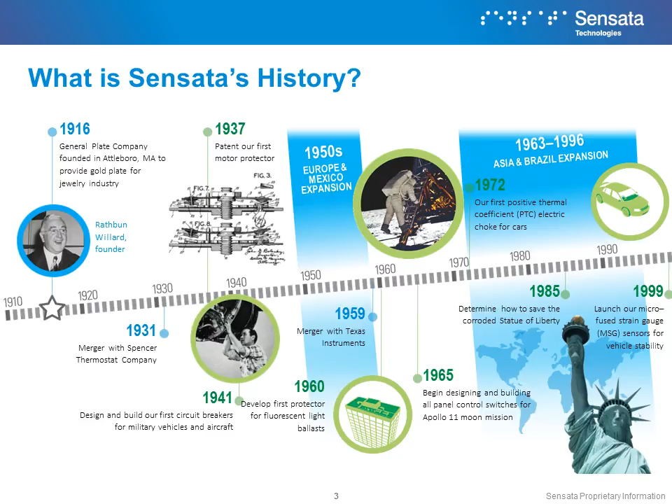Sensata started with the automotive pressure sensor 30, 40 years ago, and over time our product line was added with high temperature sensors, which we acquired through a company called Sensor-NITE in Europe. We acquired Honeywell's automotive on-board business, which offered Sensata magnetic speed and position sensor technologies.

Very near term, we acquired a company called Schrader, through which Sensata was able to acquire the product called TPMS, tire pressure monitoring system sensor technologies. The latest partnership that we have is with a company called Quanergy, which is a Silicon Valley-based company in the United States.

Based on the partnership, we are specialized in developing and commercializing solid-state LiDAR sensors, which will be used in autonomous drive.

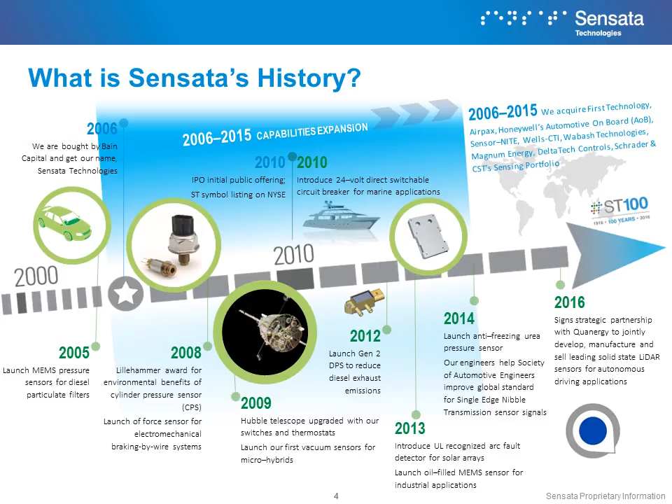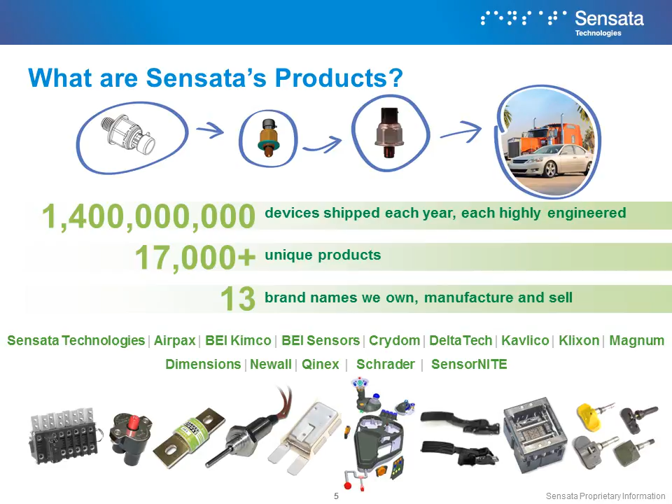Today, Sensata is shipping 1.4 billion devices, most of them highly engineered, to our customers worldwide. As many global companies do, Sensata has a global footprint in manufacturing and business, with many sales and engineering offices around the world, very close to our customers, where we can meet and respond to their needs and solve their problems. In Asia, we have footprints in China, Japan, Korea, Malaysia, and recently India.

We have an automotive headquarters office for India based in Pune, and we continue investing and developing our in-house capability under our Indian colleagues and leadership.

When we talk about automotive sensors, the key drivers are mainly three things. One is efficiency improvement - many OEMs and customers are developing and innovating technologies in combustion and powertrains to improve productivity and fuel efficiency.

Another key driver requiring additional sensors relates to safety regulations, needing to fundamentally reduce loss of life, injuries, and accidents. Today's session is very much focusing on environment protection, where we aim, with all the tightening regulations, to reduce emissions in air and water.

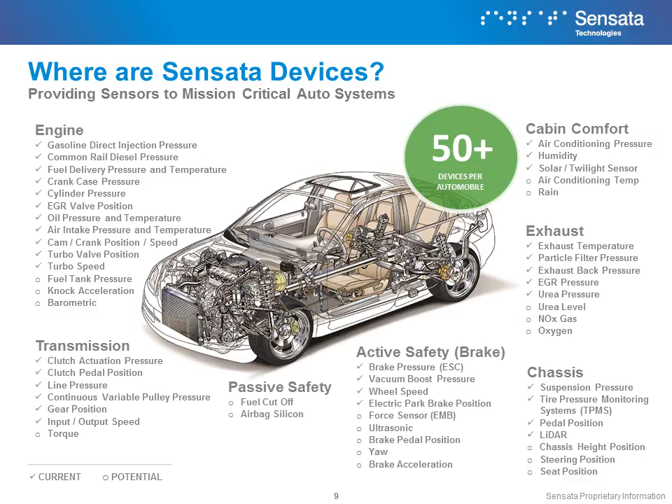Once again, we see a lot of opportunities associated with sensor content, driven by the three big pillars: fuel efficiency, safety, and clean environment requirements.

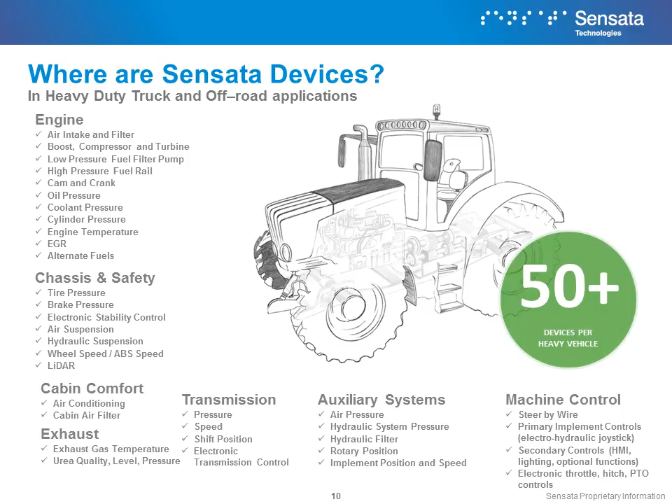We have products very similar to the applications I just mentioned for passenger cars that can support and fulfill the needs for heavy-duty trucks and off-road applications. I'm not going to go through that, but Sensata is well positioned to support our customers in complying with the needs for fuel efficiency, emission reduction, and safety.

A lot of people in the room know more than me about the global overview and emission regulations applied to different countries. Obviously, EU regulations moved from EU 3, 4, and now migrating into EU 6 and 6B and C in the future, becoming a very common global standard being deployed and adapted into many other countries like Korea.

Recently, I think China and India as well. China is moving from China 5 into China 6 stage, 6A, and later 6B. India just skipped BS5 and is converting immediately from BS4 into BS6 within 3 years. Those global emission regulations are particularly pushing a lot in terms of technology innovations and system operations.

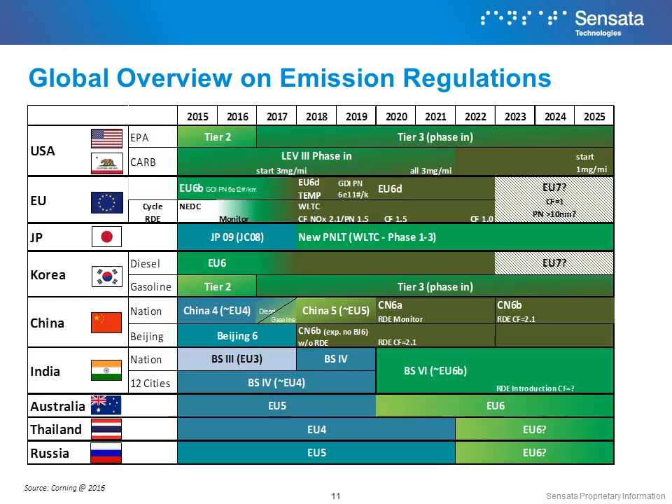And we see a lot of sensor content will be required to fulfill the needs we see. This is just to give you guys a little bit of quantified numbers in terms of how much NOx and particles will be or have been reduced based on the different stages of regulation being deployed, and continuing to improve combustion and upgrade exhaust after-treatment systems are the major two mainstreams to help us reach compliance.

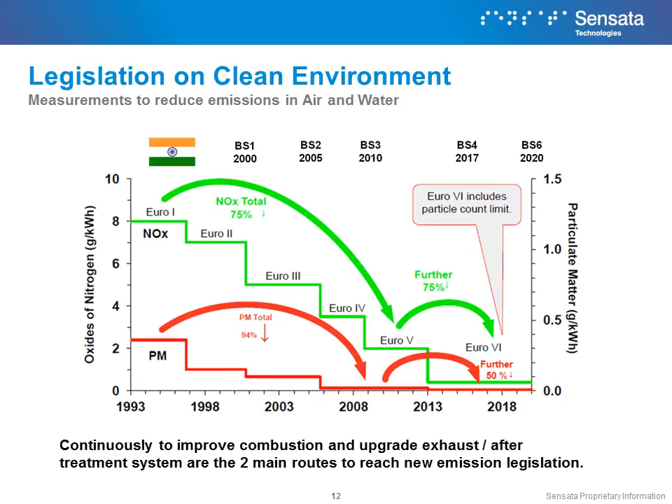Another subject, aside from the emissions story, is fuel efficiency, which is also being tightened, and there are many new systems and technology being broadly innovated and realized into the market to help continue improving fuel economy.

The advanced engine technology I talked about, GDI, more automated transmission systems, more smart and advanced air conditioning systems, stop-start, and obviously recently the hot topics about e-vehicles, hybrid, and plug-in hybrid, those kinds of things.

So more to come, but I think as human beings we continue working hard to reduce fuel use and help fuel efficiency. There will be more technology being invented.

And we are very close, as a sensor specialist, a sensor supplier, a worldwide leading sensor supplier in the world, we are very closely monitoring the status and making sure we step in as early engagement.

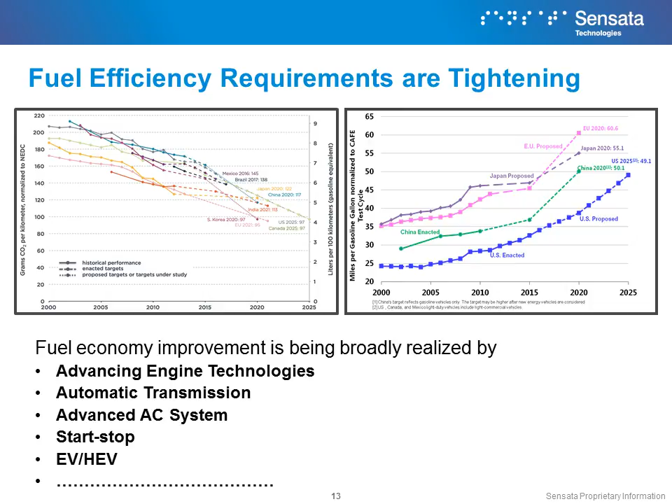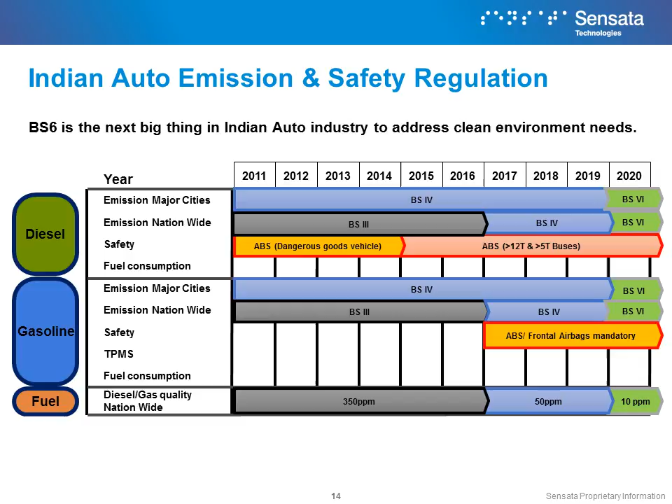Once again, those are the specific BS6 regulations that will apply to the India market, based on the timeline we talked about. And for many of us sitting in this room, BS6 is definitely a very big thing. We want to make sure we're here at the right time with the right development, investment, and technology and product we can offer to make it happen.

When you look at BS4 converting immediately into BS6, it requires a significant emission reduction for PM and NOx both. I'm not going to read those numbers, but once again, the message is that the requirement is really severe, and the time given is not enough, as I'm hearing from a lot of experts in this industry. We really need to speed up and work together, united, to make sure that by the time we're ready, it's in an economical and affordable way, deployed into the entire market.

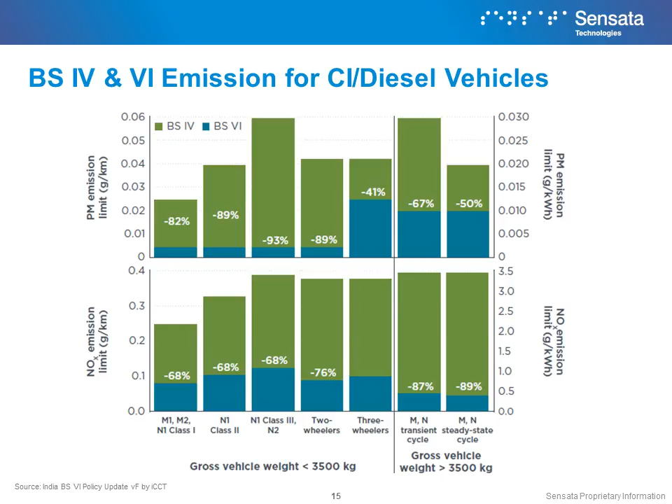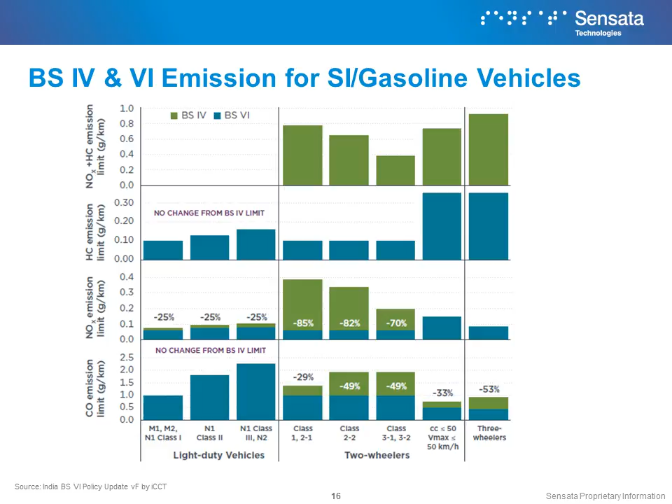This is for gasoline as well. You also see the requirement, which typically drives a significant reduction for emission items like NOx and particles.

I'm not a technical expert, but this is to try to show you guys simply, in an easy way to understand, looking at the engine and exhaust systems, when we move from different emission regulations and requirements from BS3 and 4, and now have to jump into BS6.

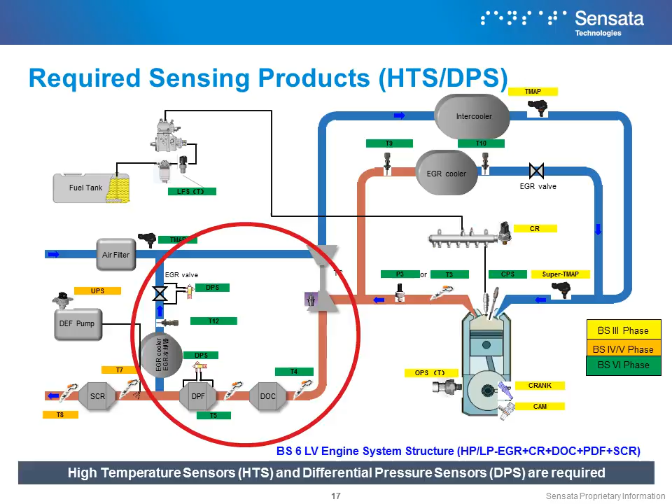Theoretically, you need many sensors, as you can see color-coded in green, like T12, T4, T5, T3, all those temperature sensors, and also differential pressure sensors will be required to make sure the whole system works perfectly and is compliant with the emissions.

Sensata has been really leading in developing products driven by those regulations. I'm going to talk about the differential pressure sensor we invented in 2005, the first. We call it DPS sensors for diesel particle purpose, developed in the EU 3 stage. Over the period, as the emission standards got tighter and more severe, we've worked with many customers to develop our DPS sensor from Gen 1 into Gen 2, and moving forward even for the gasoline particle filter application, GPF applications, with very solid products, designs, technologies and proven experience in the market.

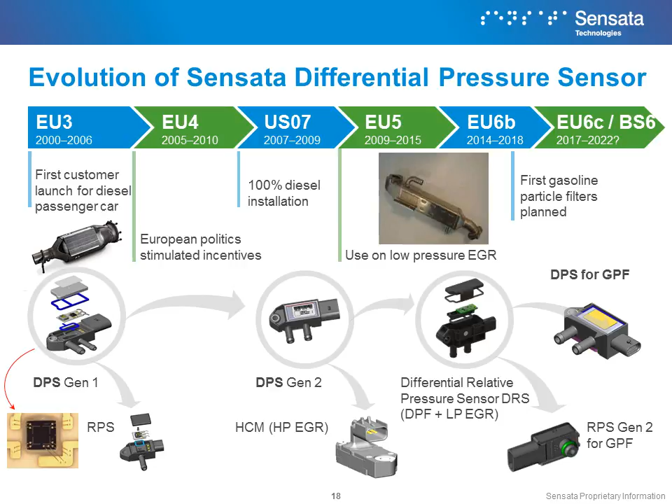So why Sensata's DPS? This product specifically addresses many key challenges from a very harsh exhaust application environment. We listed 4 major areas: drainage, icing, soot, and acid. Those are the major challenges we often face in the exhaust environment. The product is able to reduce the risks of icing and acidity with a very good dewatering system. It can also minimize the freezing of condensed exhaust gases to prevent permanent damage to the sensing diaphragm and temporal output shifts. The product also reduces degradation and corrosion from exposure to condensed exhaust gases. So those are the areas our product is well designed to address, to make sure the whole system works perfectly.

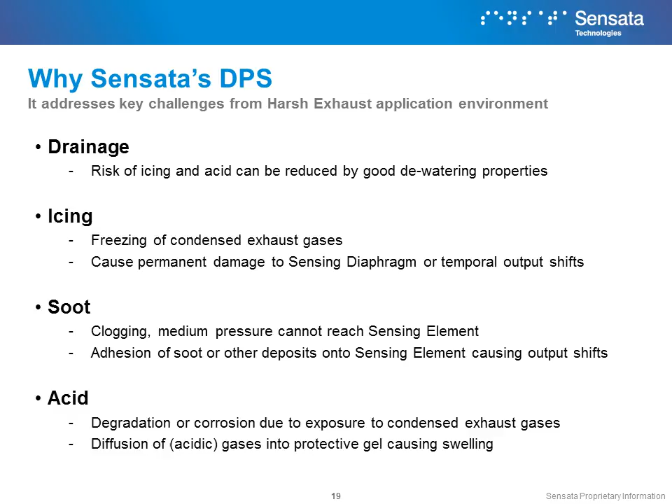Sensata is worldwide the leading supplier for DPS product. The DPS product is a so-called MEMS-based product, and today Sensata is one of the biggest MEMS-based suppliers, with annual output of over 70 million pieces to our global customers. We hold 50% market share today with many of the customers we can name. One differentiation started from the Gen 1 development in the 2002 timeframe - Sensata is able to develop in-house ASIC and sensing elements. We have the in-house development and design capability within Sensata to minimize supply chain risk, and a global manufacturing footprint from Malaysia, China, and UK to support our customers worldwide.

Another product I mentioned is high temperature sensors, which is also a very mission critical sensor used in after treatment and exhaust environments. Sensata is another worldwide leading supplier for high temperature sensors for automotive applications. We are the only supplier today globally with 3 different technologies: digital thermocouple technology, platinum technology we call PT, and NTC technology, which fulfills sensor applications for different temperature environments, from 250 degrees C to over 1000 degrees C. We also have integrated sensing element technologies within Sensata for our PT200 TS200 series products, which have the fastest response timing globally compared to many competitors.

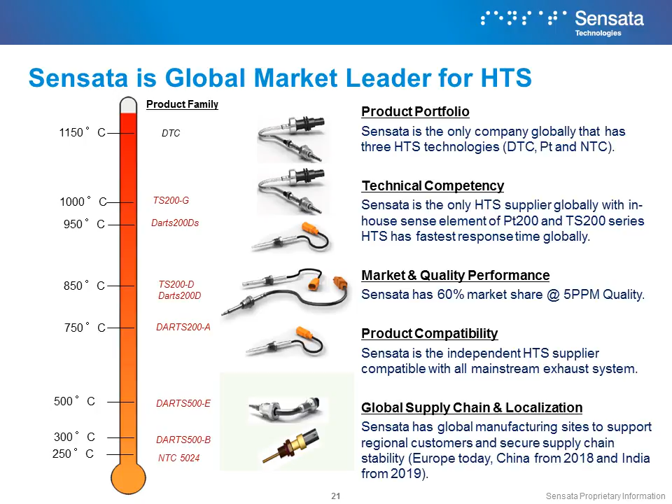We talked a lot about the exhaust side to address the emissions. One of the mainstreams as we talked about these sensors is about fuel efficiency improvement, energy efficiency improvement, and on the engine side, the engine has evolved over time, which is also driving a lot of sensor content.

I talked about the gasoline direct injection system, which we call GDI. There are GDI sensors. There's also oil pressure sensor needs. Recently, customers are talking about an integrated oil pressure sensor with a temperature sensor together to have better control and performance measurement, and this is another driver of sensor content. We call it OPS plus T.

Cam crank - I talked about DPS and high temperature sensors. Many of the sensors apply to engines as the engine evolves to improve fuel efficiency.

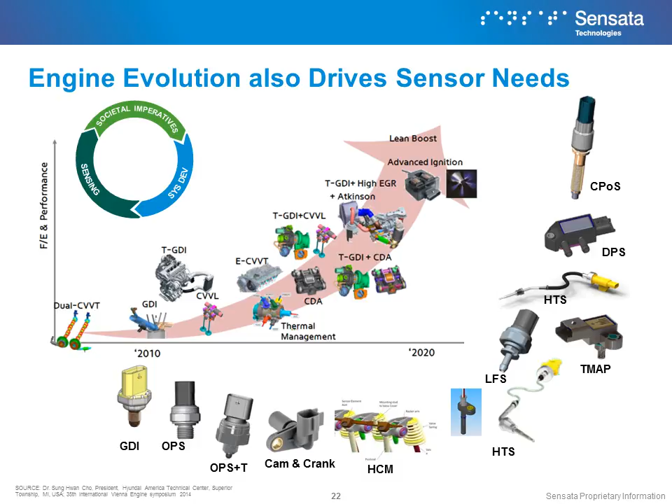Engine downsizing is mainstream. With turbocharged systems, it can generate about 10% to 15% fuel saving without sacrificing power and performance. Europe is leading, and China and America are catching up, and we also see some pilot runs in the India market.

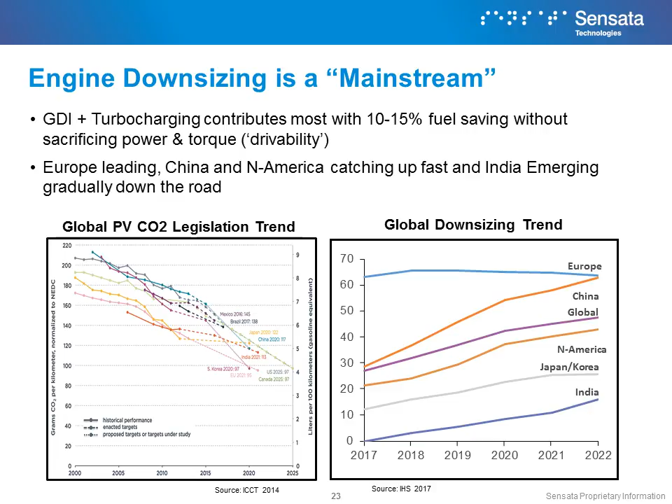Yesterday, we were at one customer meeting and talked about their first model launching with a GDI engine system. So it's very exciting to see that, and definitely, as one of the global leading suppliers, Sensata is ready to help and support.

Geographically, from 2015, the GDI market is about 36% of the take ratio for all gasoline engines, and we foresee by 2021 that take ratio will increase rapidly to about 60%, which also drives a lot of platforms and applications being deployed into the market.

Sensata is a leader in that application. Our sensors work with and are compatible with many system suppliers. Versus the competition, the big differentiation speaking about GDI sensors is that Sensata is one of the few suppliers able to meet higher pressure requirements while delivering higher accuracy performance.

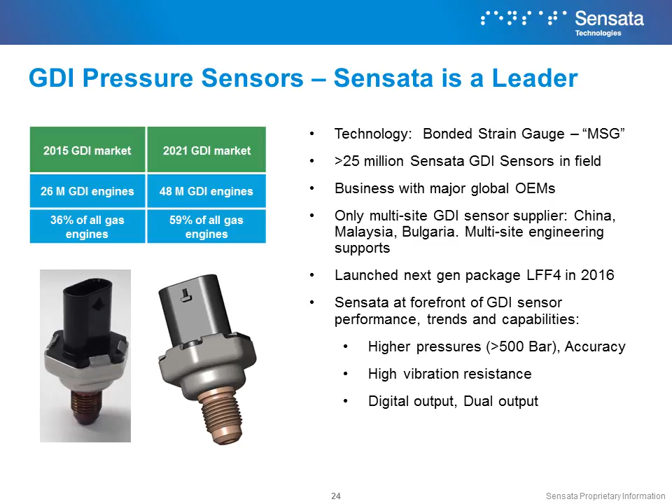Many other systems are being developed and put into place to continue driving fuel economy and fuel saving. The variable oil and fuel pump system requires OPS sensors. Stop-start systems also drive some sensor content, which we call VBS, vacuum booster sensors.

Many people talk about EGR systems, which require differential pressure sensors and temperature sensors as well. Those are the listed products in Sensata's comprehensive portfolio that we offer into the market, supporting those advanced systems and technologies and continuing to evolve through early development to achieve the fuel efficiency we talked about.

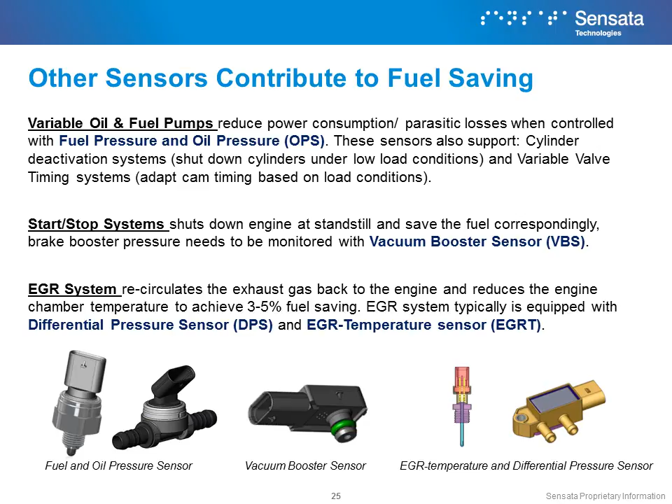Sensata is here to sell value to our customers. We are the largest independent automotive sensor supplier globally, with tremendous leadership in pressure sensors, high temperature sensors, and speed and position sensors, which fundamentally fulfill the needs driven by fuel efficiency, safety, and environmental protection.

I mentioned our broad system expertise and compatibility, that we can work with many tier 1 systems, whether engine, transmission, exhaust, air conditioning, or safety systems. We have vertically integrated in-house sensing element development and design capabilities, which uniquely enable us to continue improving performance as well as driving cost reduction.

We have a very strong global footprint to facilitate flawless execution and meet customer needs regionally and globally. I missed one point I want to talk about: today, when you look at the products Sensata offers to the market, every single product can be produced at a minimum of 2 manufacturing sites that Sensata has globally.

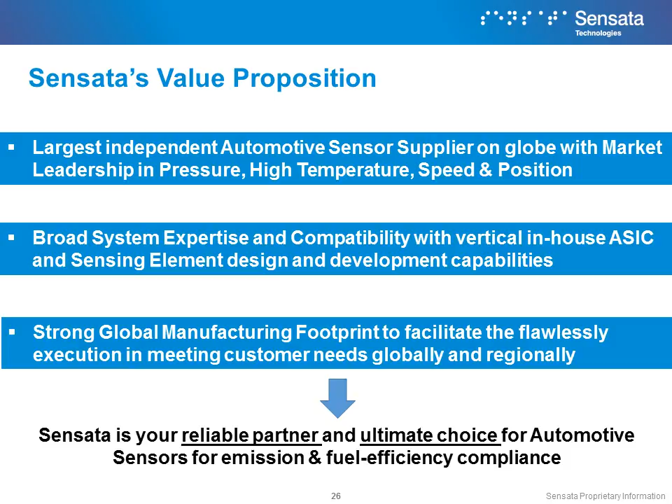That's the end of my speech. Thank you very much.